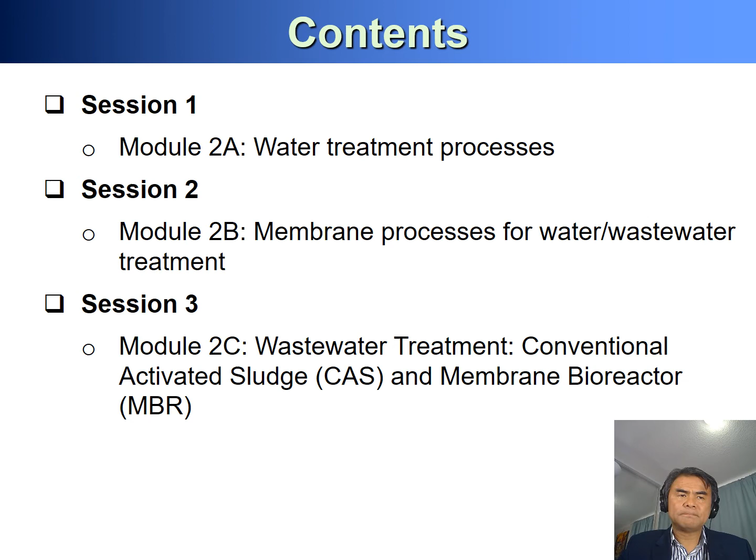So let's start with session 1, module 2A, the water treatment processes or technologies. This session covers different treatment processes or technologies involved for surface water treatment, where and why these treatment processes or unit treatment processes can be applied in a treatment train in a water treatment plant.

By the end of this session, you should be able to understand in more detail what treatment units are required for the water treatment plant, including some of the design considerations and also some of the optional treatments required for problematic water sources.

Before we start with the treatment processes, I want to ask why the treatment is required. I'm sure some of you know, but for the benefit of those who may need a recollection from undergraduate studies: why is the treatment of wastewater required? What are the treatment goals?

Surface water comes from various sources - rivers, streams, lakes, groundwater, rainwater, and so on. But because they are in contact with the environment, they can contain a lot of contaminants, making the water unpleasant in appearance, color, taste, and odor. These contaminants may include suspended solids, dissolved chemicals, dissolved gases, heavy metals, dissolved organic matter, and many other types. All these contaminants have to be removed to make the water pleasant and safe for drinking purposes. That's the reason why we need water treatment.

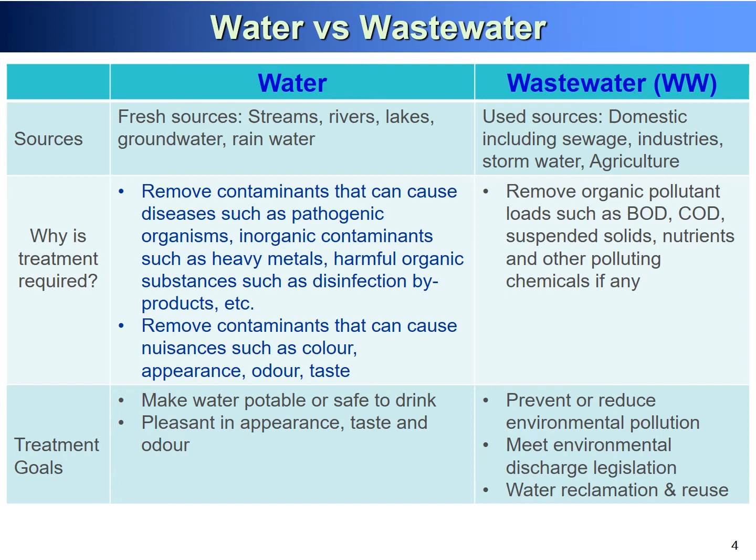As you may already know, any water treatment plant or wastewater treatment plant does not rely on a single treatment process. We need a series of different treatment processes targeting different types of contaminants, because one treatment process is not effective in removing all the types of pollutants present in the water. Hence, water or wastewater treatment processes can be divided into three major groups: physical process, biological process, and chemical process.

In the physical process, we use simple physical forces such as gravitational forces, momentum, pressure, etc. to remove pollutants from the water. Physical treatment processes include mixing, flocculation, flotation, filtration, sedimentation, etc.

The next is the chemical process. In this treatment approach, chemicals are used to remove pollutants, decompose pollutants, or convert them from one form to another so that they can be easily removed by physical or biological processes. This includes treatment processes such as precipitation, coagulation, adsorption, oxidation, disinfection, decomposition, etc.

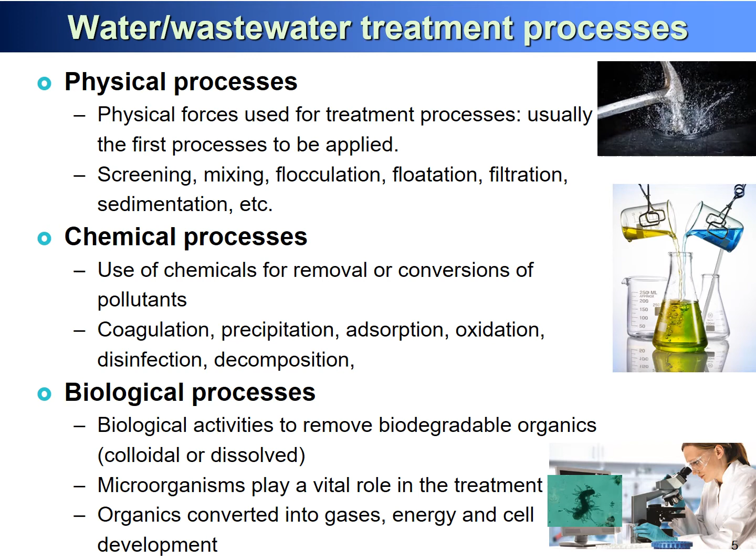The water that we get from the various sources such as rivers, streams, lakes, etc. are first treated at the water treatment plant and made potable for human consumption. After the fresh water from the tap has been used, it is discharged as wastewater from the users.

The wastewater is then collected and sent to the wastewater treatment plant, where it is subjected to a series of treatment processes before releasing back to the environment from where it came, thereby closing the water cycle.

Of course, if a very high quality treatment is performed, then the treated wastewater can be used for non-potable purposes such as irrigation, car washing, cooling, etc.

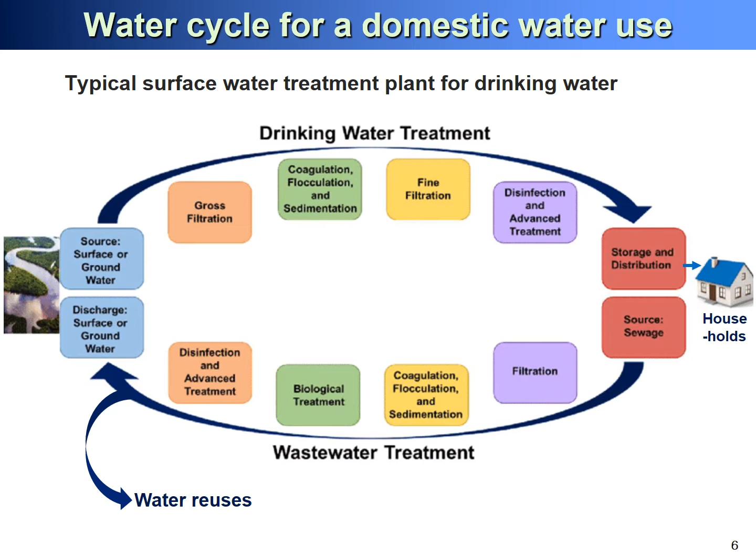This water reuse is nowadays becoming very popular because of the limited freshwater resources due to climate change and global warming impacting the climate. Reusing treated wastewater is in fact one way of significantly reducing the freshwater demand.

The first stage in the water treatment or wastewater treatment plant is the screening process to remove large matter that often comes with the surface water, such as in rivers and lakes.

The second process consists of a grit chamber to remove larger and settleable particles with high specific gravity or density, such as gravels, sand particles, etc.

The third process consists of a rapid mixing chamber where coagulant chemicals are dosed and subjected to rapid flash mixing to enhance coagulation or mixing.

This process is followed by the flocculation chamber, where slow mixing is applied to form large particles of floc, aggregating all the smaller floc particles formed, so that it can settle easily by gravity.

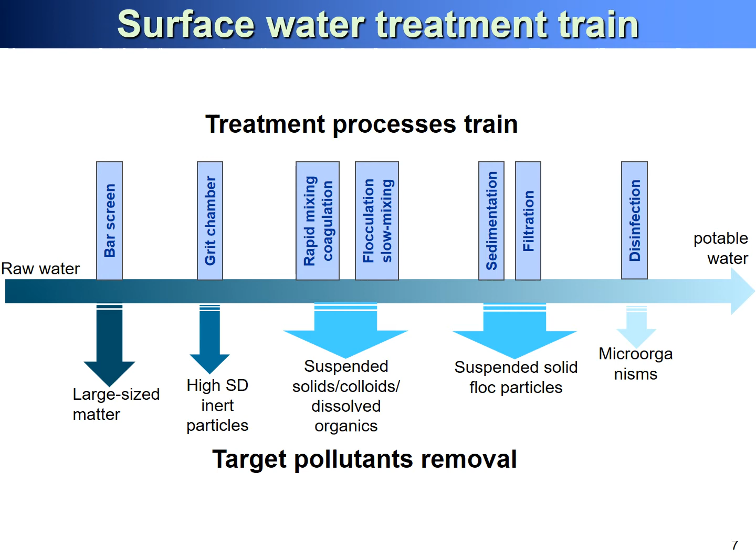After the disinfection, the treated water, which is clean and safe, is then supplied for drinking purposes to households and other uses.

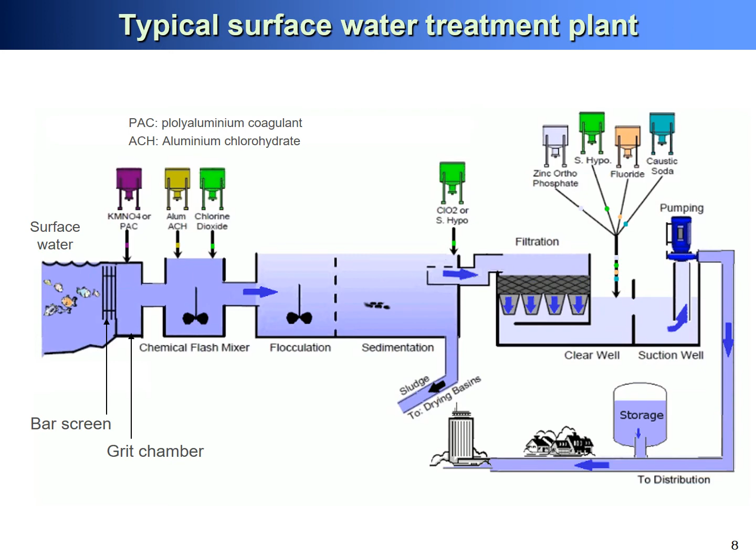The most notable difference that you'll see is the existence of the primary and secondary treatment units in a wastewater treatment plant.

These treatment units are required, basically the biological treatment process, for the removal of the large amount of organic matter present in the wastewater. Organics can be in various forms, such as settleable organic solids, suspended solids, or dissolved organic matter.

Wastewater treatment plants also produce large amounts of organic sludge, which require further treatment through the use of a sludge digester that helps microorganisms convert the organics into methane or energy, and also biosolids, which can be further used as soil conditioners.

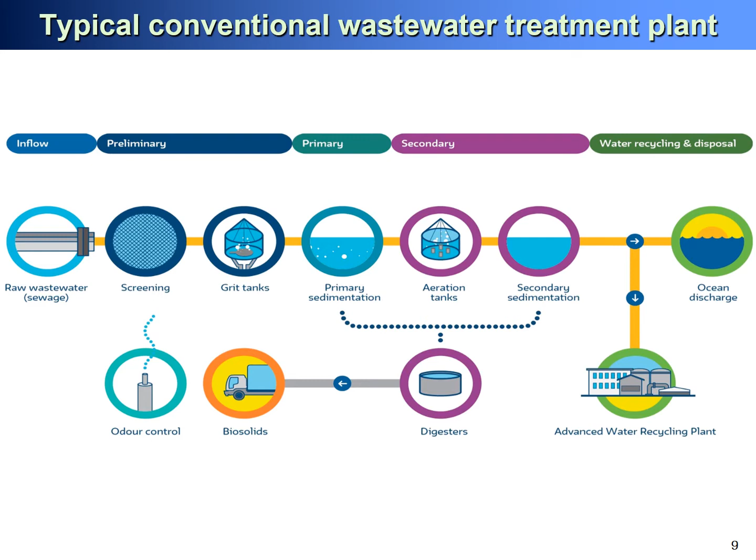We will be talking more about the wastewater treatment process in session 3. So from here on we will be talking about individual processes or treatment units separately.

First comes the screening process. Screening is the process of removing large objects present in the water. It can be in the form of rags, large plastic objects, timber, branches, twigs, metal objects, and many other floating objects that may be subtle also. If they are not removed, they would cause damage to the pumps and blocking of the pipelines at the wastewater or water treatment plants. So screening is the first treatment unit in any water treatment plant, because the main objective is to first remove the largest object matter present in the water.

A screen can be of several types, but mainly a coarse screen or fine screen, depending on the size of the opening. Sometimes the screens are also associated with comminutors that grind or pulverize the large objects into smaller particles that can pass through, and also can be easily separated.

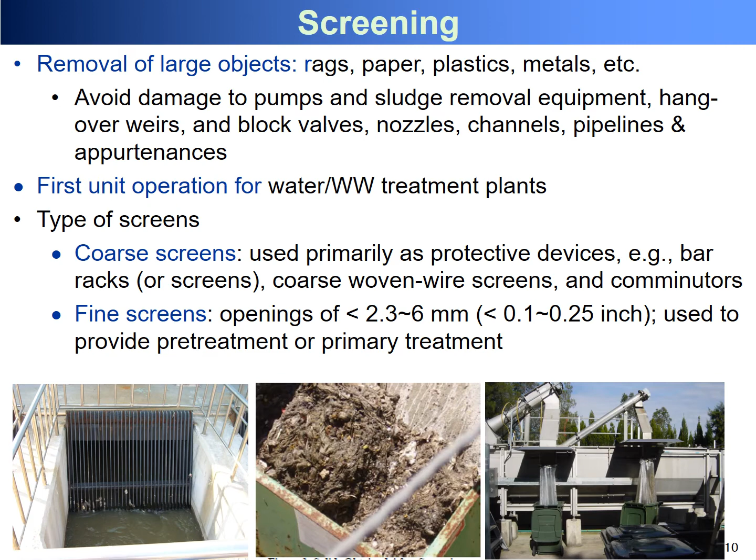The next treatment unit in a water treatment plant is the grit removal or the grit chamber. Surface water, especially if coming from running rivers and streams, can contain a lot of heavy particles with high specific density and gravity that are not removed by the screening unit. These heavier particles are termed grit, and they can consist of particles such as sand, gravels not removed by screen bars, cinders, eggshells, bones, chips, and other inert particles. So the second stage of the surface water treatment plant is usually the grit chamber to remove this grit from the surface water. Grit chambers are basins to remove these inert particles and prevent damage to the pumps, and also to prevent their accumulation in the sludge digesters.

The design of the grit chambers involves reducing the flow velocity of the water to allow settling of only the grit particles. Grit particles are subjected to two types of velocities: horizontal velocity due to the flow of water, and settling velocity due to the gravitational weight, size, and weight of the particles. Lowering the horizontal flow velocity increases the residence time of the particle in the grit chamber, allowing enough time for the particles to settle at the bottom and then be removed.

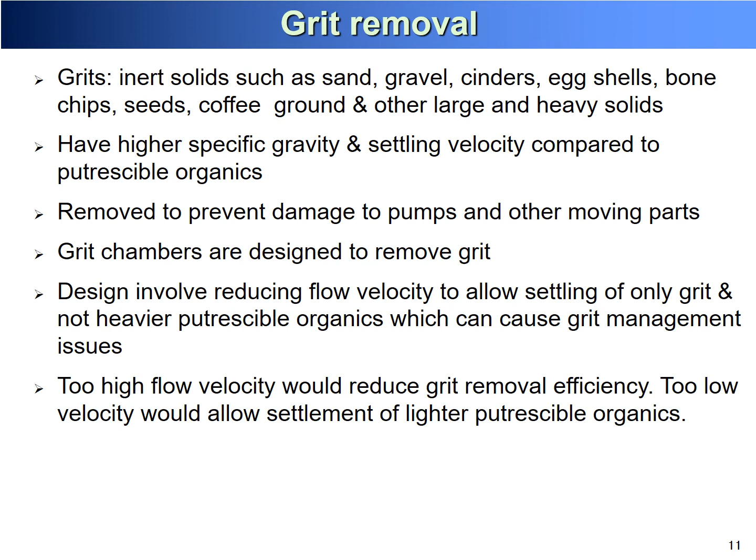There are three types of grit chambers: horizontal flow type, which can be rectangular or square shape; aerated grit chambers; and vortex type grit chambers. Both of the latter are in the form of circular shape.

In the aerated grit chamber, the design consists of a spiral flow aeration tank provided with air diffusion tubes placed on one side of the tank. The grit particles tend to settle to the bottom depending on the particle size and the bottom velocity of the roll of the spiral flow. This bottom velocity is controlled by the rate of air diffusion through the diffuser tubes. So the heavier particles settle down, whereas the larger and lighter organic particles are carried into the roll of the spiral motion.

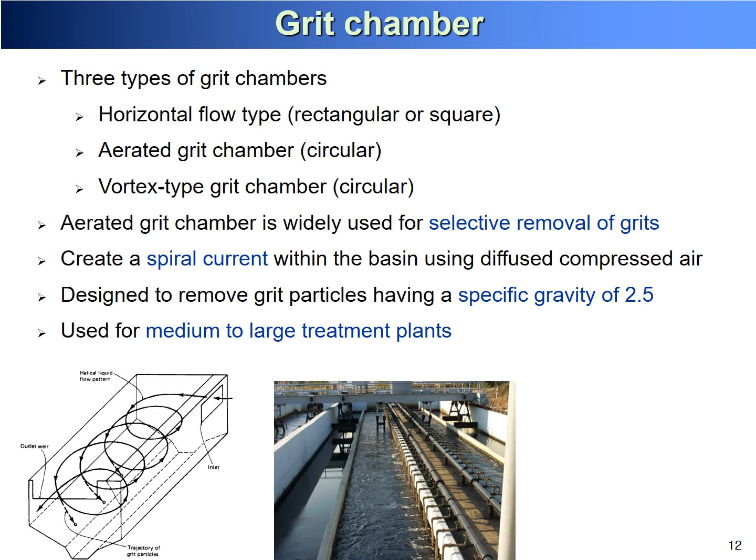The chamber can also be either mechanically cleaned or manually cleaned. Horizontal grit chamber is the most common type of grit chamber used worldwide, because it is simple in design, and also much cheaper in construction and operation compared to the aerated or vortex types.

This table shows the design guides of the horizontal grit chamber. You'll see that the design parameters include the detention time, the residence time of the water in the chamber. The residence time will depend on the horizontal flow rate of the water, the grit chamber cross-sectional area, and the horizontal flow velocity. The approximate settling velocity of the particles depending on size is also provided as a guide.

When you design a grit chamber, the elevation of the grit chamber with respect to the successive treatment units should also be considered, since there can be some head loss in the grit chamber, especially if the water treatment plant is designed based on gravitational flow.

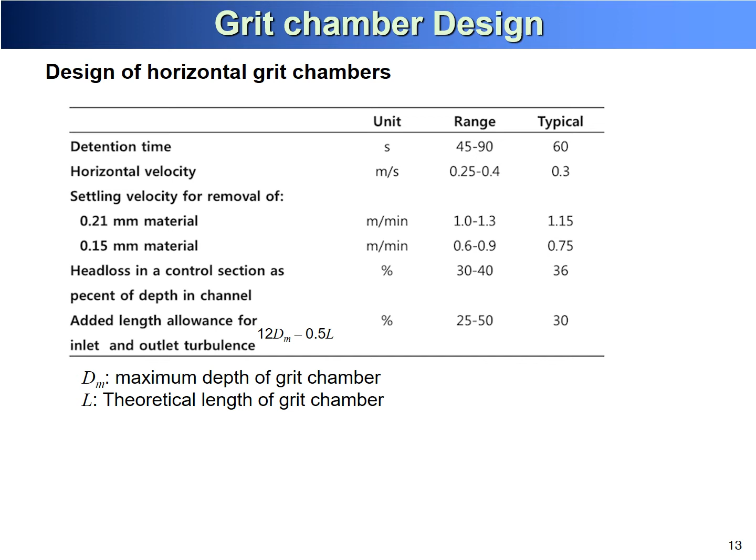The next treatment unit is aeration or oxidation. This is not found in a typical water treatment plant, but is an optional treatment applied if the water contains problematic components that cause taste and color in the water. Usually aeration is adopted by small water treatment plants with very low flow rates, and it's not usually present in large water treatment plants.

In this aeration, air is supplied to the water using air diffuser aeration, or sometimes water itself can be sprayed into the air, which we call air stripping. Basically, we try to provide oxygen to the water to have contact with the contaminants. The removal mechanisms by aeration involve two types: scrubbing action and oxidation action. Most dissolved gases are in fact removed by scrubbing action during aeration, which scrubs the gases present in the water by providing oxygen.

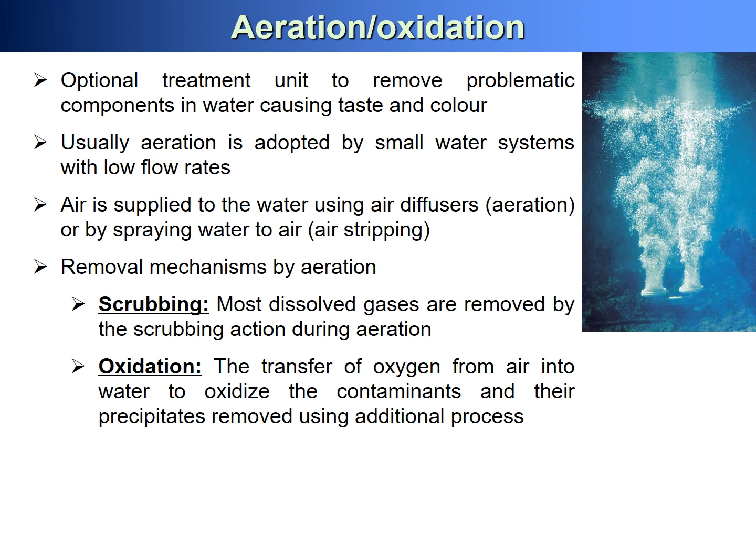Aeration is applied to remove color from the water. Usually groundwater contains a lot of iron and manganese. This manganese can cause color, an unpleasant color in water. For example, iron can cause reddish colored water, whereas manganese can cause dark brown or black color in water. They have to be removed because they create a very unpleasant appearance of the water.

Removal is usually recommended if the iron content in water is more than 0.3 milligram per liter and manganese more than 0.05 milligram per liter. Or the combined manganese and iron should not be higher than 0.3, and if it exceeds that, you have to provide aeration to remove this.

This chemical formula shows how ferrous reacts with oxygen in the presence of water to form ferric hydroxide, which is a solid precipitate that can then be removed from the water. Likewise, manganese also reacts with oxygen and water to form manganese oxide, and this precipitate can be removed from the water by either settling or filtration.

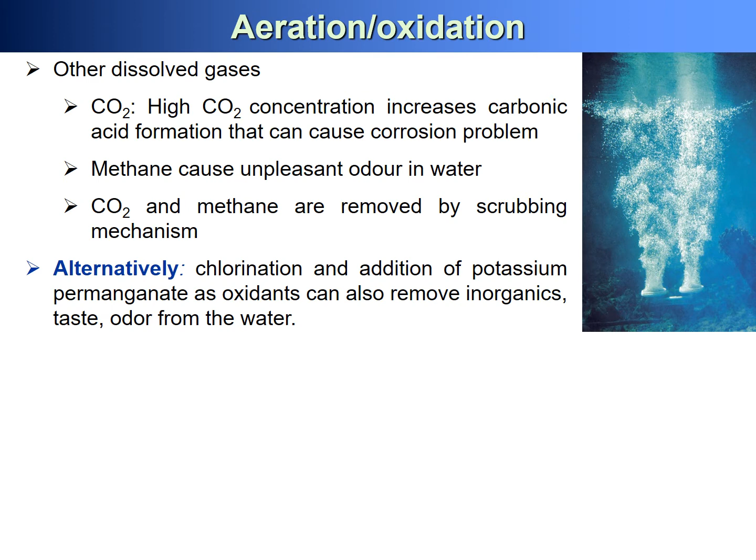Air stripping is another form of providing oxygen in the water to remove contaminants that's problematic for water. In aeration, which we covered earlier, oxygen is dissolved in the water to react with contaminants such as iron and manganese, or to scrub out gases that cause odor, including hydrogen sulfide, carbon dioxide, and methane. But air stripping is the process of transferring the water component containing these volatile compounds into the air stream. Basically, you're spraying the water containing these contaminants and bringing it in contact with air.

In the aeration process, a small amount of air stripping happens, but it's not significant. In air stripping, the water becomes very saturated with oxygen and provides a significant amount of aeration, making it much more efficient in providing oxygen to the contaminants in water. Air stripping alone is not a cost-effective way of providing aeration, but aeration alone is very inefficient at removing volatile compounds. So combining and correctly applying air strippers with aeration can be a very effective and cost-effective, powerful process for providing rich oxygen to remove problematic components in water.

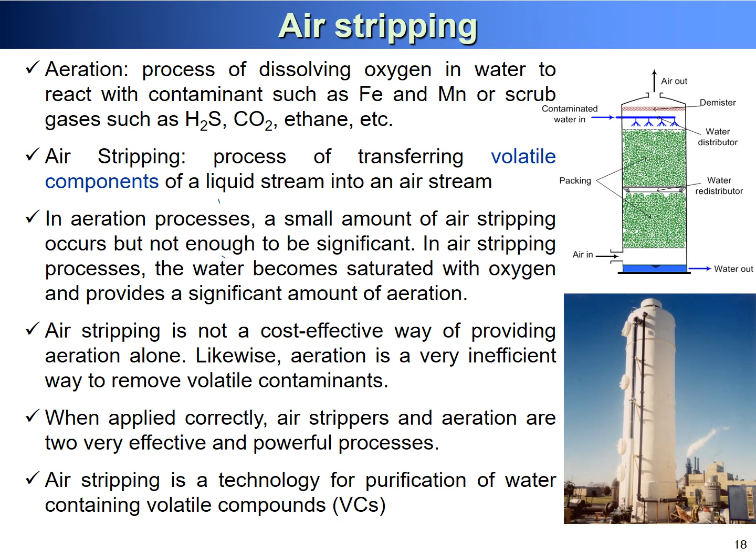Air stripping is the technology used for purification of water containing high volatile compounds. Volatile compounds have relatively high vapor pressure and low aqueous solubility, and they are characterized by a dimensionless Henry's law coefficient. This explains the mechanism of how gaseous volatile compounds can be removed from water by air stripping. Henry's law coefficient is the ratio of the concentration in air to the equilibrium concentration in water, meaning the concentration of the contaminants or volatile compounds in water.

Contaminants with relatively high Henry's law coefficients can be economically stripped from water by air stripping. That's why we apply this method to remove volatile compounds, because they have high Henry's law coefficients. These contaminants include BTEX compounds such as benzene, toluene, ethyl benzene, and xylene, usually found in gasoline, and solvents including trihalomethane, trichloroethylene, and tetrachloroethylene. These compounds are usually found in regions associated with oil reserves.

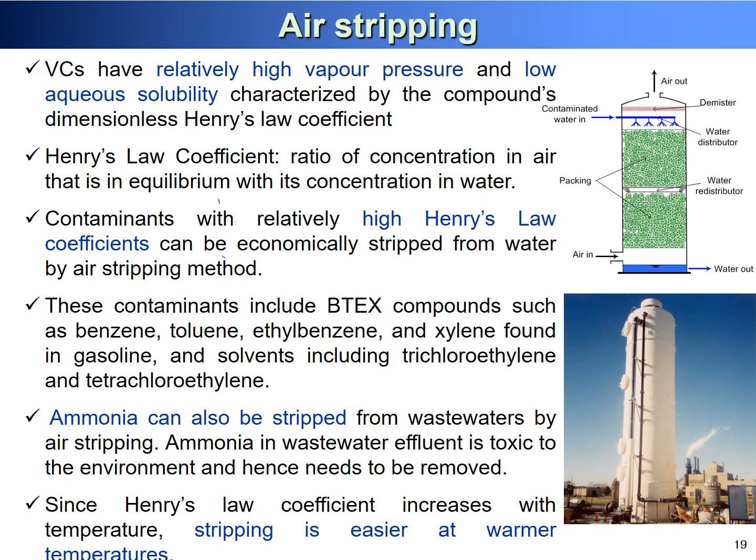It takes a very long time for them to settle — the smaller the particle size, the longer it takes to settle down. So it becomes impractical to use gravitational settling to remove these suspended particles, because it requires very long retention time, meaning very large settling basins.

Besides their size, suspended solid particles also have a net negative surface charge in water, which promotes electrostatic repulsion between the particles, keeping them from settling. This is also aided by their Brownian motion, which keeps them moving and prevents them from settling down.

Turbidity is the measurement used as one of the indicators for colloidal particles or suspended solids in water. Turbidity measures the cloudiness of the water. For potable water, turbidity should be less than 0.5 NTU, and generally it is recommended to be less than 0.1 NTU.

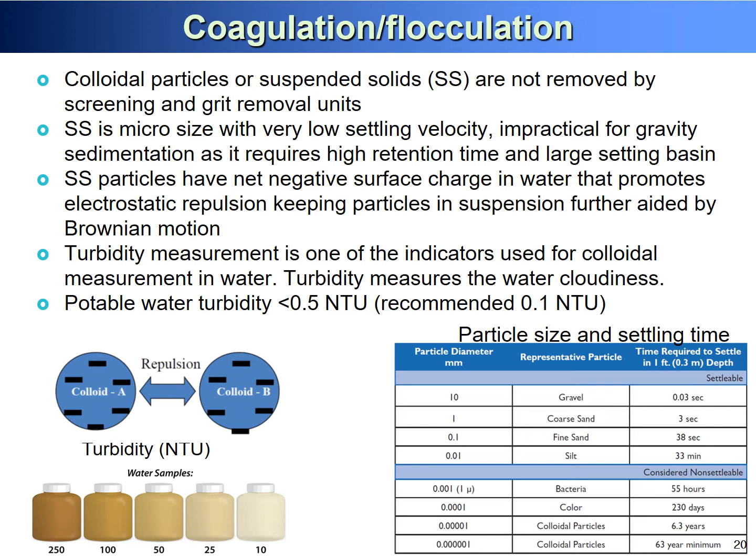If the suspended solids or colloidal particles cannot be settled down, we must have some means to remove them. Coagulation and flocculation are the processes of removing suspended solids from water. Coagulation is the process of destabilizing the colloidal particles or suspended solids by adding chemicals that neutralize the negative charge of the particles. Coagulation is essentially a chemical process, because you add chemicals to the water.

Flocculation is the physical agglomeration of destabilized particles to form larger size aggregates known as flocs, which can be effectively removed by sedimentation or flotation.

During the coagulation process, smaller flocs are formed because the charge is neutralized. When the charges are neutralized, the suspended particles agglomerate and join together, becoming a larger floc. Flocculation further aids in agglomerating these smaller flocs, forming larger aggregates.

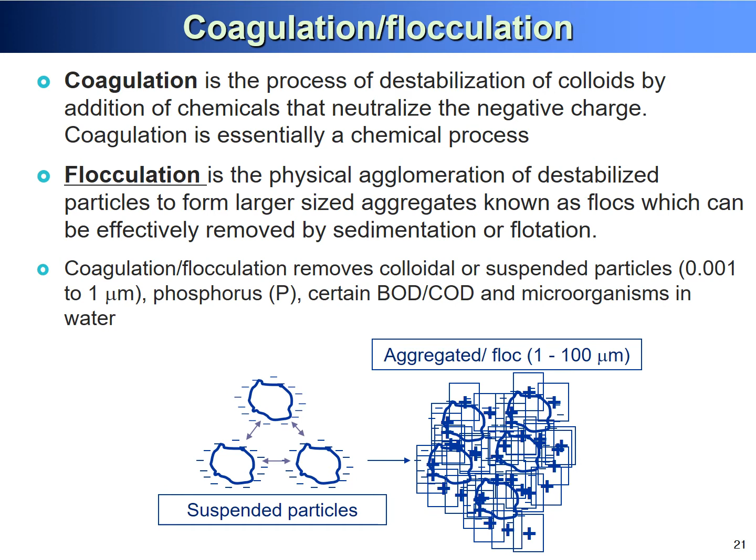Coagulant, sometimes called flocculant, is the chemical used for the destabilization of the colloids or suspended solid particles. Chemicals used as coagulants include alum or aluminum sulfate, polyaluminum chloride, ferric chloride, ferric sulfate, polymers, and some other novel coagulants that have been recently developed

This Al3+ is responsible for neutralizing the charge of the negatively charged suspended solids. So the negatively charged suspended solids move towards the Al3+ aluminum ion, agglomerate with each other, and neutralize.

When they neutralize, there's no more electrostatic repulsion. With no electrostatic repulsion, during Brownian motion the particles collide with each other, and larger aggregates are formed, which then settle down after forming a larger floc. This is called charge neutralization, and this is the mechanism of how larger flocs are formed through flocculation, and then removed.

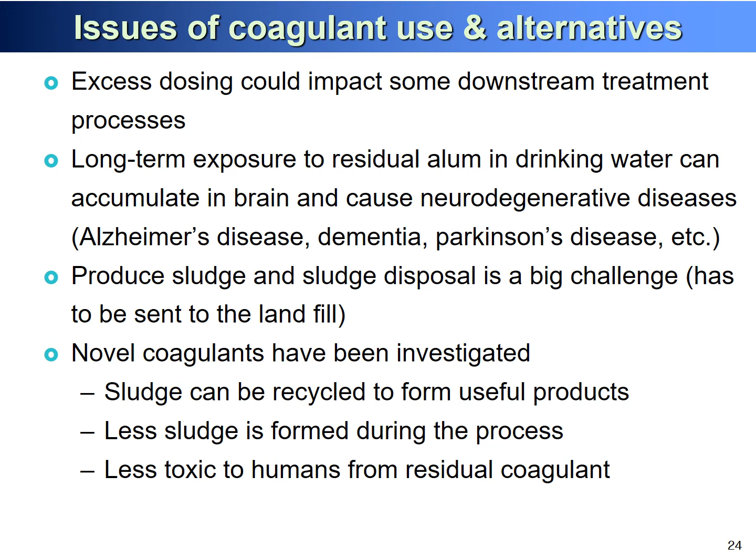Our group, led by Professor Ho Kyong Shon, has done quite a lot of work on the development of novel coagulants that can be recycled to form useful products. An example is the titanium-based coagulant: titanium chloride, titanium sulfate, polytitanium chloride, and polytitanium sulfate. These are some of the examples of the novel coagulants being recently investigated by our group.

Titanium based coagulants are quite expensive, but the advantage is that titanium based coagulants can have a lot of different species in water, and because of that the charge neutralization is very effective because they are multivalent cations.

The most useful advantage is the ability of the sludge to be converted into titanium dioxide, which is a very useful photocatalytic material in nanoparticle form. After the coagulation, the sludge is burnt, and after burning the sludge and grinding the residual product, you get a titanium dioxide powder.

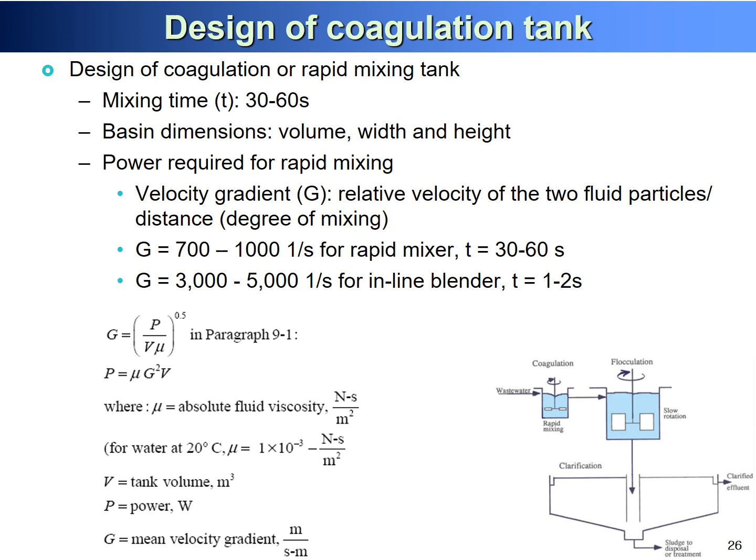G is the velocity gradient, which gives the degree of mixing. G values should be between 700 and 1000 per second for a rapid mixer with a mixing time of around 30 to 60 seconds. But if we want to do inline mixing, instead of having a separate rapid mixing tank, you can mix inline through the pipeline. In that case you can assume G to be around 3000 to 5000 per second, with a very short mixing time of only 1 to 2 seconds.

Next is the design of the flocculation tank, or the slow mixing tank. For this, you can use a detention time of around 20 to 60 minutes, and based on that you can determine the dimensions of the tank: volume, width and height. The G values for flocculation should be around 20 to 80 per second, and typically G times T should be within the range of 2 times 10 to the power 4 and 10 to the power 5.

Why do we give these ranges? Because if you have a larger G and a smaller T, you will get a dense floc but very small floc particles. But if you have a smaller G, meaning very slow mixing, with a much longer mixing time, this gives you a very large floc size but not a very dense floc, so it cannot settle easily. So we need a balance — we need a larger floc that is also heavier, or denser.

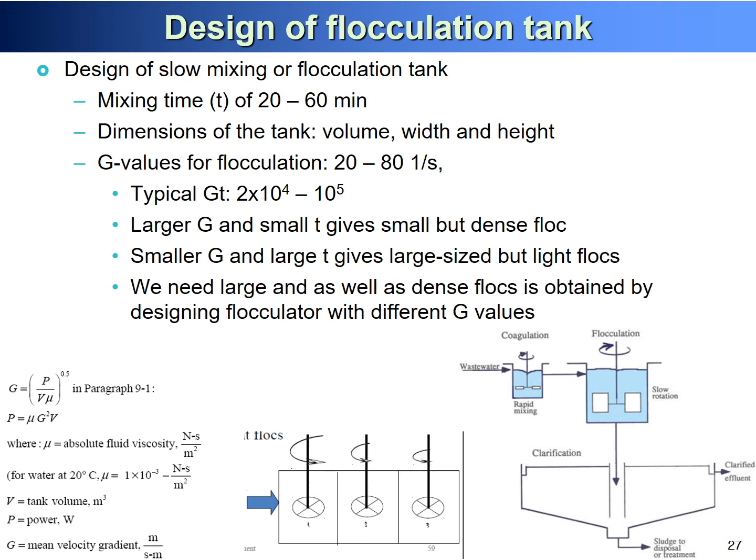Sometimes this can be achieved by designing a flocculator with different G values. The same equation can be used for the design of the flocculation tank.

Once the water is passed through the coagulation and flocculation tank, then it is sent to the sedimentation tank. In the flocculation tank, the smaller floc particles that are formed aggregate to form larger, heavier flocs, and then when they reach the settling tank, the suspended solids or these aggregated particles are allowed to settle by gravity and then removed from the water.

So how they do this is by designing it in such a way that the water velocity in the settling tank is lowered below the suspension velocity of the particles, and this allows enough time for the aggregated particles to settle at the bottom by gravity and be removed. This process is also sometimes called clarification, settling tank, settling, or sedimentation.

Gravitational settling because of the formation of larger floc particles is one way of settling, but there are also other mechanisms involved in the removal in sedimentation tanks. This flocculation is caused by the different settling velocities of the particles, and when they settle, these heavier particles overtake the lighter particles, and they coalesce with each other, meaning they aggregate and form larger particles that then settle at the bottom. In fact, this clarification or sedimentation could remove up to 90% of the suspended particles from the water.

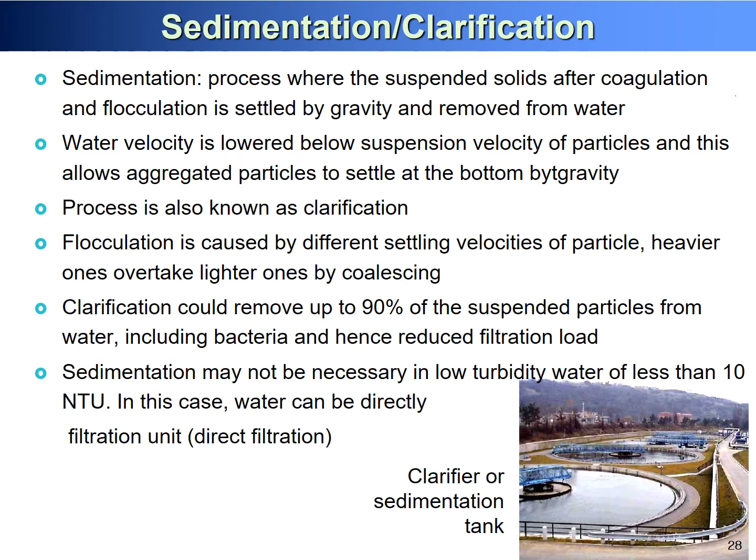The sedimentation tank can be designed as a rectangular tank, which is one of the simplest forms of design. They are quite cost effective and have low maintenance cost, but the disadvantage is that they require a very large area because they are very long in length.

So usually in most cases, the circular sedimentation tank is the most preferred sedimentation tank that you will see in most water treatment and wastewater treatment plants. Sometimes square sedimentation tanks are also provided. The sedimentation tanks can also have a scraper at the bottom to remove the sediment, whatever is settled at the bottom.

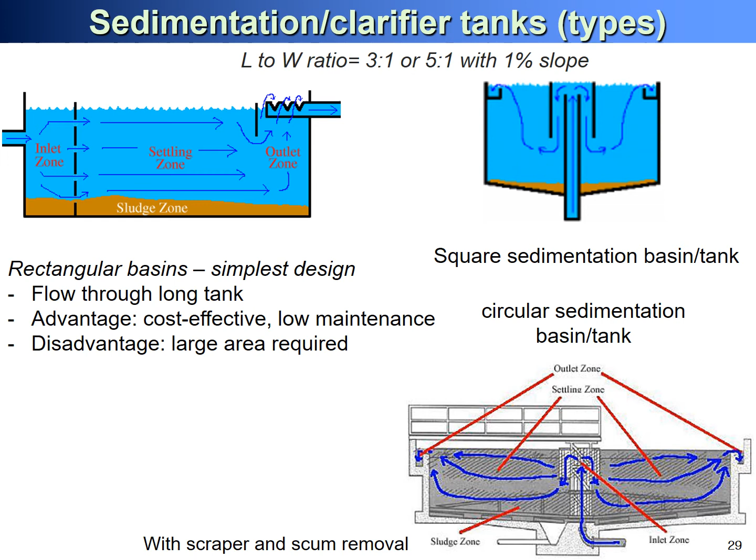Sometimes the range of height that you can provide is also given, and based on that you can find the surface area of the tank, or sometimes the width to length ratio of the sedimentation tank is also given if you are designing a rectangular or square sedimentation tank. The height of the sedimentation tanks is usually recommended between 3 meters and 3.6 meters, and based on these design guidelines you can design the sedimentation tank.

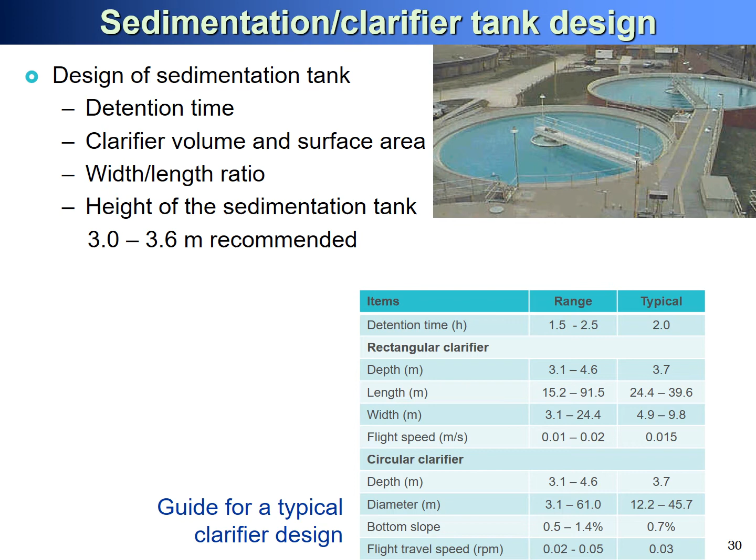So the next stage of the water treatment plant is the filtration unit. The water coming from the sedimentation tank still contains about 10% of the suspended solids. So the objective of filtration is to remove those suspended solids and the floc particles that are too small to be effectively removed by the sedimentation tank.

The filtration removes the suspended solids or small floc particles by physical straining, sieving, settling, and adsorption within the filter media. In fact, filtration can remove up to 99.5% of the suspended solids coming from the water leaving the sedimentation tank.

The filtered water after filtration can have less than 0.5 NTU of turbidity, but the desirable level is less than 0.12 NTU. Nowadays filtration is a must in most water treatment plants, because turbidity can be problematic: microorganisms growing in the suspended solids are hard to kill by chlorine disinfection, and sometimes the colloidal particles themselves use up a lot of chlorine, affecting the residual chlorine.

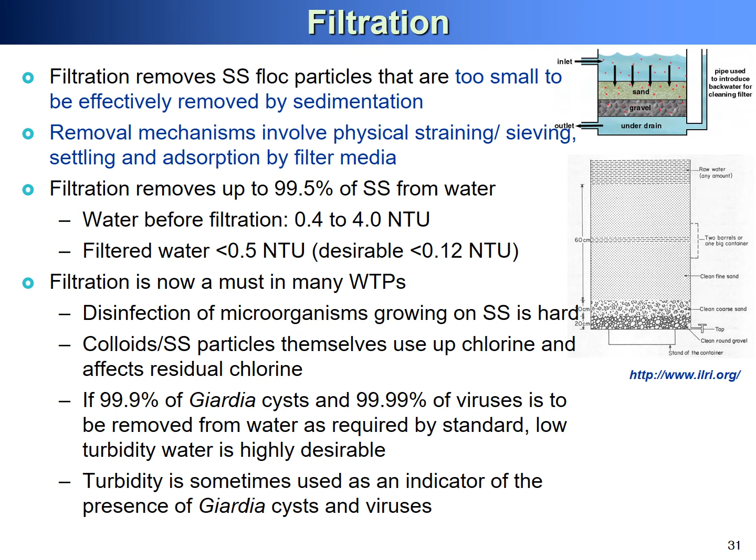For the design of the filtration unit, the type of filter media and the size are quite important. The types of filter media can be single media, such as sand, or dual media, anthracite coal and sand, or multimedia, which is a mixture of 3 or more different types of filter media.

So dual or multimedia filter is more effective because sometimes it can potentially remove some other problematic pollutants present in water by adsorption.

As particles are removed by filtration, the particles deposit on the filter media surface and get clogged, which can result in head loss. Because of this, sometimes the turbidity can also increase in the filtered water. So in order to solve this problem, the filter has to be backwashed.

Backwashing involves forcing water in the reverse direction of filtration to dislodge all these deposited particles from the filter media. It's usually done once a day, and it takes about 10 to 15 minutes, and this is done using clean water usually stored in the overhead tank.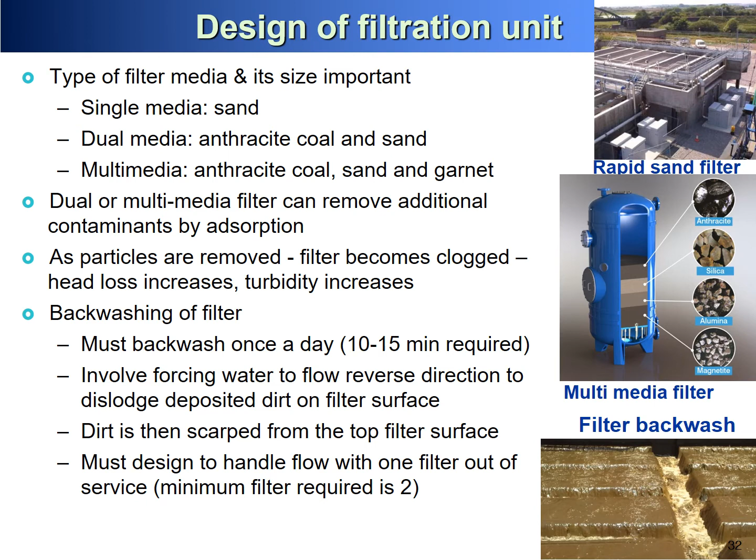For the design of the filtration unit, surface loading is the important parameter that we need to consider. Surface loading relates to the amount of water flow rate that you can apply per square meter of the filter area.

So for slow sand filter, it is between 2.9 and 7.6 cubic meters per day per square meter. Which means if you have a water treatment capacity of 2.9 cubic meters per day, then you need 1 square meter of filter area.

For rapid sand filter it is much more, about 120 to 300 cubic meters per day per square meter.

As I said earlier, normally we need to construct at least 2 filter media, and usually the number is designed as an even number. The surface area of each filter should be less than 100 square meters.

So if, for example, 300 square meters of filter media is required, then it's better to provide around 4 numbers of filter media.

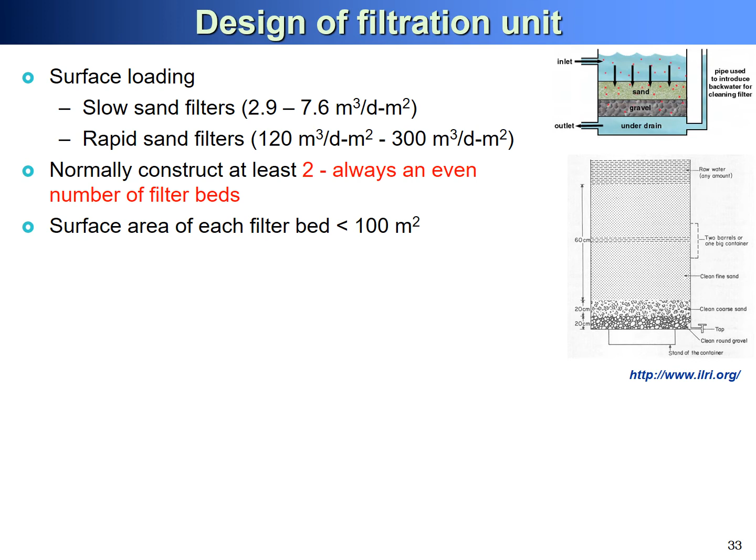The next process in a water treatment plant is adsorption. This is an optional treatment because you don't find this process in a typical water treatment plant, but it is applied usually for removing problematic compounds or contaminants present in water, especially if they are present in very low or trace concentration.

Adsorption is the process of adhesion of atoms, ions, or molecules of gas, liquids, or dissolved solids onto the surface of the adsorbent. So what it does is basically a surface phenomenon.

The adsorbent can be a natural adsorbent such as soil, sediments, etc., or it can be man-made, anthropogenic, like activated carbon, silica, etc. They provide a very large surface area, and the dissolved compounds or contaminants in water can be removed by this adsorption.

For example, trace compounds such as pesticides, heavy metals, pharmaceutical compounds, and personal care products are hard to be removed by filtration and coagulation. So if you must remove them from the water, adsorption is the effective way of removing them.

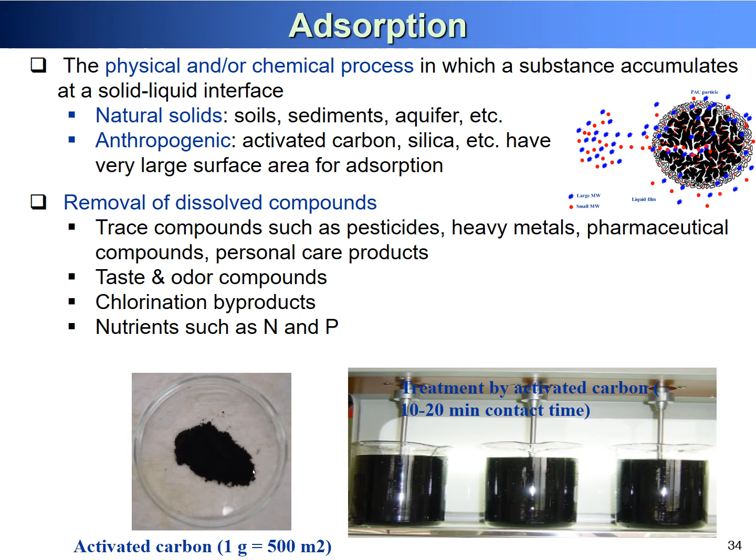The theoretical adsorption capacity of the adsorbent can be described by adsorption isotherm. I'm sure some of you must have learned this in chemistry in high school and also in undergraduate. So there are types of isotherm: Langmuir isotherm, BET isotherm, and Freundlich isotherm.

Freundlich isotherm is widely used in water treatment. This isotherm shows a curve relating the concentration of the solute on the surface of an adsorbent to the concentration of the solute in the liquid which it is in contact with. So basically it gives you the kinetics of how the removal process happens from the water using a particular adsorbent.

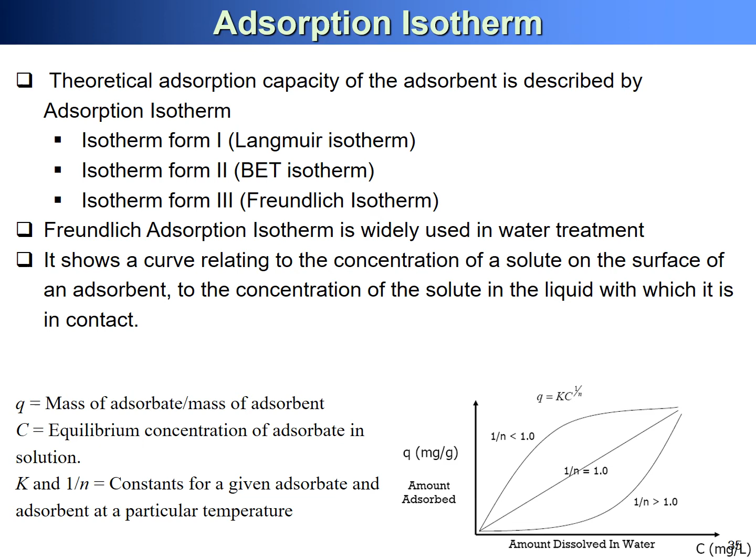The next is the ion exchange process. Ion exchange is the process of exchanging ions between electrolytes, or between an electrolyte solution and a complex. Ion exchange is an optional treatment unit and is not found in a typical water treatment plant.

Ion exchange is sometimes used for treating hard water. Hard water is caused by the presence of excess calcium and magnesium in the water, and ion exchange is one of the processes used for removing excess calcium and magnesium from the water.

In the softening stage, hard water containing calcium and magnesium passes through the packed resin containing a lot of sodium ions attached to it. The calcium and magnesium ions present in the water are exchanged with sodium, and the water coming out of the ion exchange tank contains more sodium and less calcium and magnesium, making the water soft.

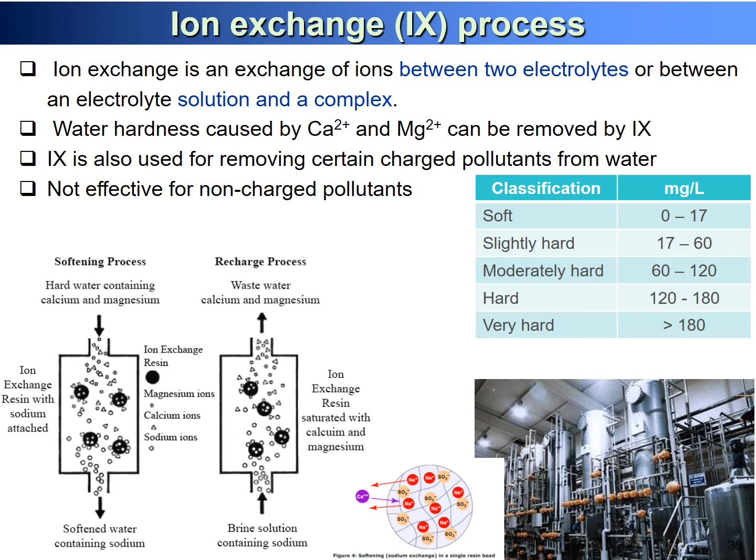So one cycle consists of the softening process and the recharge process, and it continues working this way. But to have continuous operation, usually there will be two ion exchange tanks: one working in the softening stage while the other is working in the recharge stage.

The last treatment unit in a water treatment plant is disinfection. The clean water coming from the filtration unit is subjected to disinfection before it is sent to the water supply system. The water used for drinking and cooking should be free from pathogenic organisms that can cause disease.

Diseases and illnesses such as typhoid, dysentery, cholera, and gastritis are very common if the water is not properly disinfected. So the biological quality of drinking water is determined by the test for the coliform group of bacteria.

Coliform is found in the intestinal tract of warm-blooded animals and also in the soil. Their presence in the water indicates pathogenic contamination, but they themselves are not considered pathogenic. Therefore, coliform bacteria is used as an indicator for pathogens, because they are easy to test, survive longer, and are less sensitive to disinfection.

The standard for coliform bacteria in drinking water should be less than one coliform colony per 100 milliliters of water.

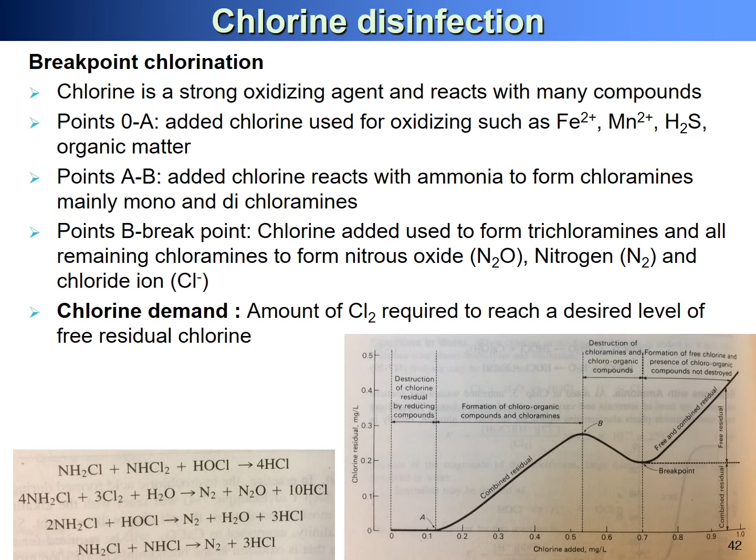In an ideal water supply system, the free chlorine should be at a concentration of 0.3 to 0.5 milligram per liter after a 10-minute contact time. Regarding chlorination levels, sometimes a situation arises such that it doesn't allow adequate contact time with the normal dosages of chlorine.

In such cases, we do superchlorination, which is the process of providing a very high concentration of chlorine to achieve very high residual chlorine, say from 3 to 5 milligram per liter, which is 10 times the recommended minimum breakpoint chlorine concentration. The retention time for superchlorination is around 5 minutes.

But having very high residual chlorine is not really recommended. So in order to bring the residual chlorine down to an acceptable level, dechlorination has to be done before supplying the water. The dechlorination process involves removal of total residual chlorine or combined or free chlorine from water with the addition of sulfur dioxide, activated carbon, sodium sulfite, or sodium metabisulfite as additional chemicals, in order to reduce the toxicity of residual chlorine on the downstream pipelines.

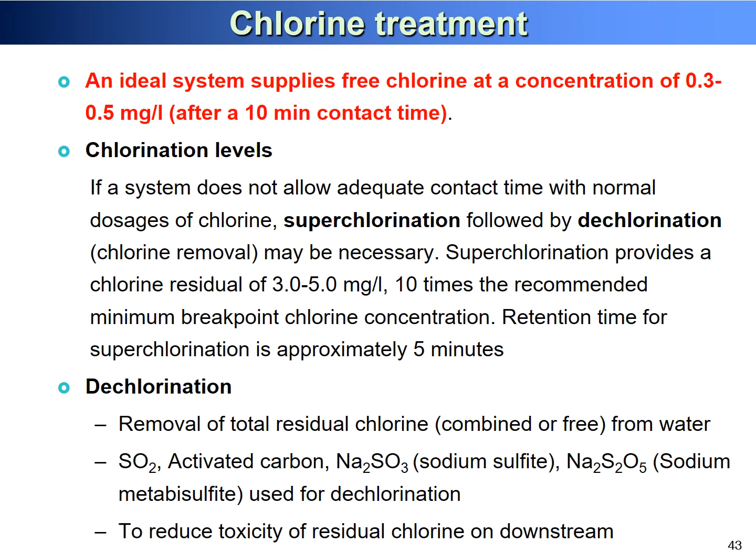Superchlorination is usually used during the outbreak of epidemics such as cholera, dysentery, and other waterborne diseases.

There are other disinfectants, including hypochlorite salts such as sodium hypochlorite and calcium hypochlorite, but they are not as effective an oxidizing agent as chlorine. Chlorine dioxide is another one. Ozone, of course, we have seen, but we already touched on it. And ultraviolet radiation and advanced oxidation processes—but we have already covered this in the earlier session.

The Australian Drinking Water Guidelines state that chlorine in the water pipeline should not be more than 5 milligram per liter—this is the maximum permissible. Normally, the chlorine concentration in the drinking water pipeline should range between 0.5 and 1.5 milligram per liter. In fact, in drinking water, if it's treated well...

by coagulation and flocculation followed by filtration, 1 milligram per liter of chlorine for 30 minutes contact time is generally sufficient to reduce bacterial numbers. For wastewater treatment, it requires up to 20 to 40 milligram per liter of chlorine.

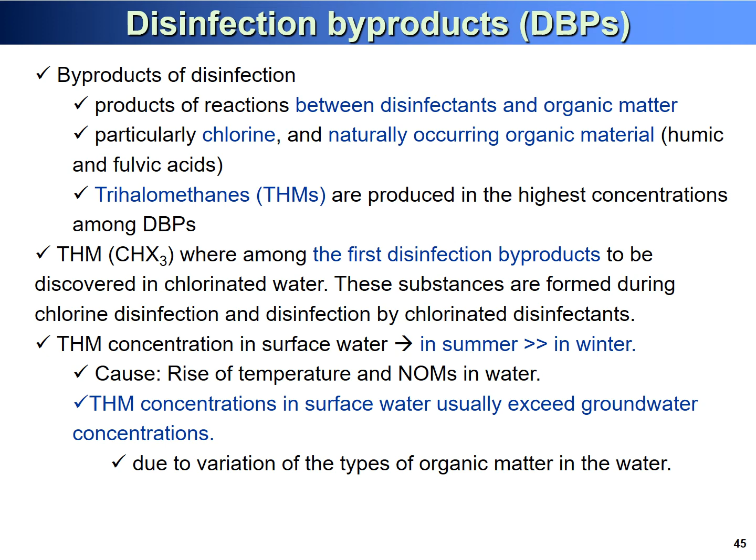THM concentration is quite high in surface water compared to groundwater, and in summer THM formation is higher than in winter, because the concentration of natural organic matter and the temperature play a vital role in THM formation.

THMs are considered carcinogenic because they can damage the liver, kidneys, and central nervous system. That's why in some countries there are standards stating that the THM concentration should not exceed certain limits. I don't have the exact number here, but in the United States they have a standard for THM concentration.

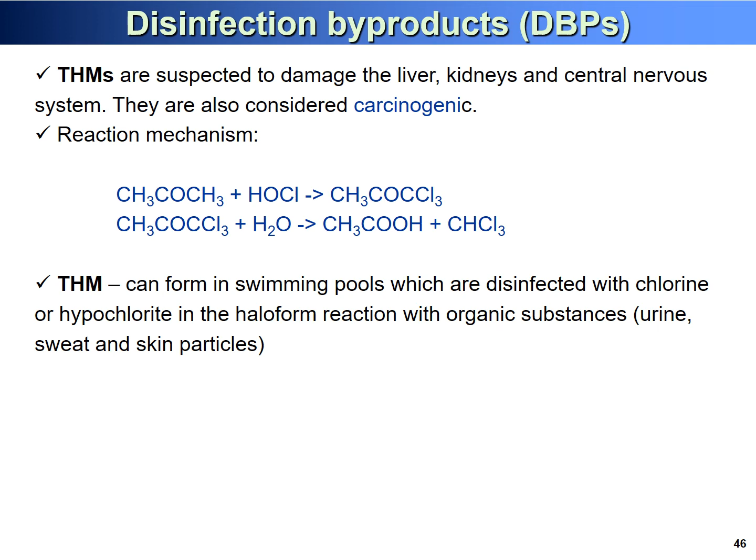THMs can also be formed in swimming pools where chlorine or hypochlorite is used as the disinfectant. When it reacts with urine, sweat, and skin particles from people, it can also form THMs or disinfection byproducts.

The next is UV disinfection. UV is electromagnetic radiation at a wavelength of 100 to 400 nanometers, and can be very effective in denaturing the DNA of microorganisms, thereby killing or inactivating them in water. The UV wavelength of 255 to 265 nanometers is the most effective in destroying DNA and RNA of the microorganism, and is the most lethal wavelength for UV disinfection.

At 280 nanometer wavelength, UV is able to denature proteins and enzymes as well. The quantity of energy transmitted at a wavelength of 254 nanometers is usually the standard used for estimating UV disinfection potential for any water. However, UV disinfection is seen as a very energy intensive process, and the lamps are quite expensive.

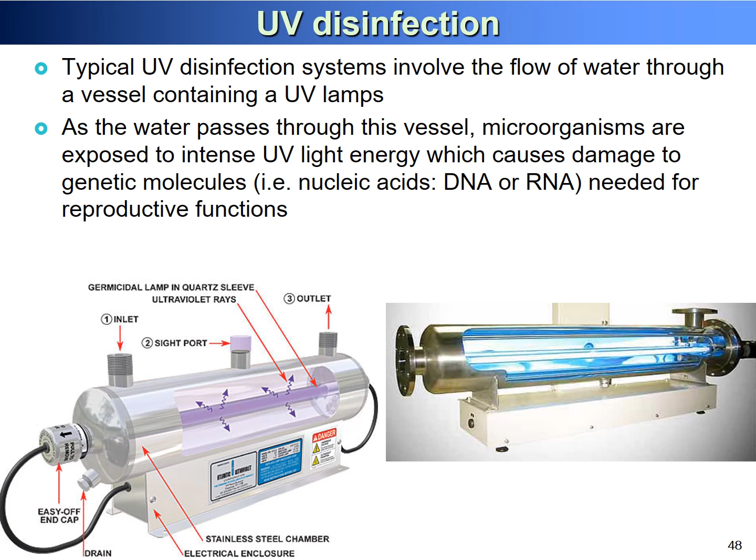However, for UV to be effective for disinfection, it requires maintaining a minimum UV dose. The UV dose can be calculated using an equation, a multiplication of UV intensity and time of exposure. You can do the calculations, and the minimum time of exposure is around 10 to 30 seconds, to achieve or inactivate 99.9% of bacteria.

For UV disinfection to be effective, the water being treated has to have very high transmittability, meaning the turbidity of the water has to be very low, less than 0.12 NTU. If the turbidity is very high, then UV disinfection is not very effective, because it will not transmit the UV, rendering it ineffective.

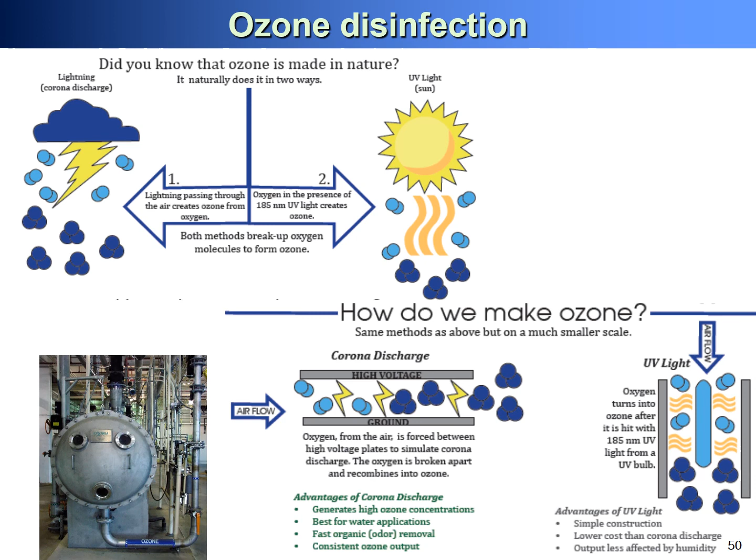Similarly, the same UV light approach can also be applied to form ozone. The corona discharge method can generate very high ozone concentrations and is best for water applications, while ozone generation using UV light is simpler in construction and lower cost than corona discharge.

So it can directly oxidize, for example, nitrite to nitrate. It also helps remove color and dissolved organic matter by breaking up non-biodegradable compounds into smaller, more biodegradable compounds. It also helps remove dissolved and fine particulate matter in water, thereby enhancing the water treatment processes.

How does ozone kill bacteria? The healthy bacterial cell wall is very important for bacteria because it ensures the organism maintains its shape and stays intact. But as ozone molecules come in contact with the cell wall, an oxidative burst occurs which creates a tiny hole in the cell wall, thereby injuring the bacteria.

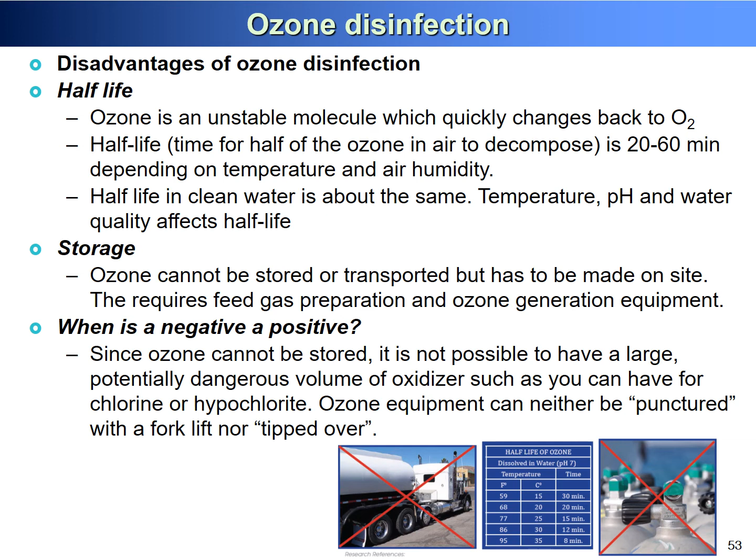And so it has to be used immediately, and it cannot provide residual chlorine or residual disinfection. Besides, ozone cannot be stored or transported; it has to be generated on site. This requires feed gas preparation and ozone generation equipment. It needs pure oxygen, because if you use air as the source of oxygen for generating ozone, it's not very effective. So these are some of the disadvantages of ozone disinfection.

Finally comes the selection of the water treatment process and processes. You'll see that this is the most challenging part of environmental engineering for water treatment. Selecting the best, most ideal, or optimum processes is quite challenging. So usually you start with the process diagrams, which is a flowchart of the treatment trains that you're going to establish for the water treatment plant.

But while working on your process diagram, it's important to consider the following. First, you need to understand the characteristics of the source water you're going to design for. The source water characteristics include what contaminants are present in the water. If you know the detailed characteristics of the water, you can target what the treatment requires to remove, because after all, the objective of treatment is to remove these contaminants. If there are no contaminants, there is no treatment required.

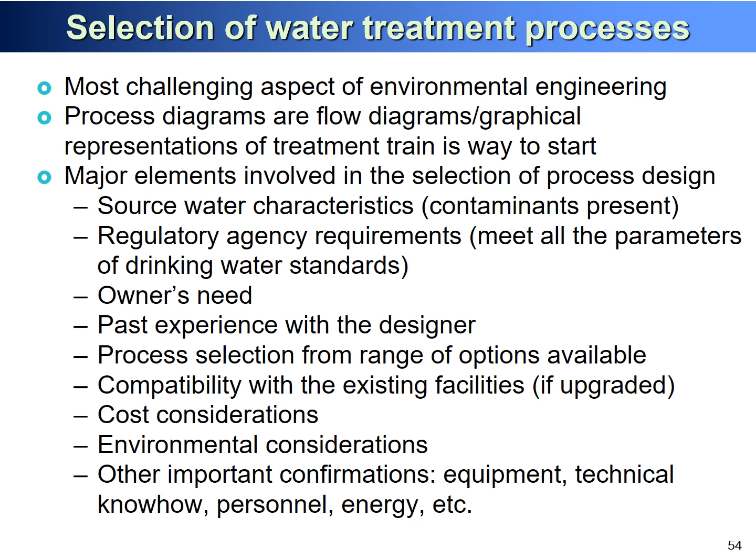And the personnel, technical know-how of the people. If the local people don't know the technology, then it is a problem, because once you install the water treatment plant, it can cause problems with operation, maintenance, and troubleshooting. And the energy, of course, I already mentioned.

So let's recap what we have learned earlier and try to apply this to the process diagram - the process train in a water treatment plant, a typical water treatment plant. Depending on the water characteristics, in some cases you may just have to have chlorination.

You don't have to have any filtration or coagulation - that depends on the quality of the water. If the quality of the water is very clean, then only chlorination is required just to disinfect the water and supply it directly to the people. This usually happens on a very small scale in villages, especially where the water source is very clean - maybe a very clean stream, or the groundwater is very clean. When you have that kind of very clean water source, you just chlorinate and supply it. You don't require other treatment.

And maybe if there are some particles of concern, a little bit of suspended solids - if the turbidity is maybe, say for example, between 1 and 5, not very high, but the water is still quite clear - then you can use just simple filtration like sand filtration or coal filtration, together with chlorination, and supply it for drinking water purposes.

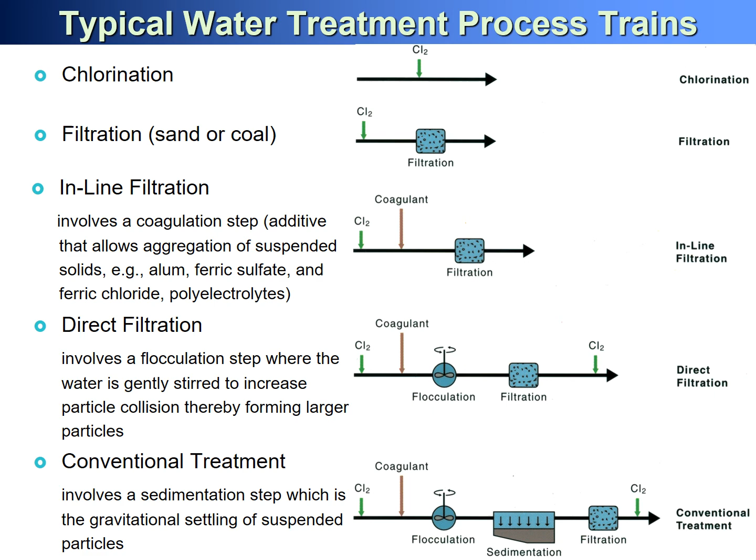But in most treatment plants, or conventional treatment plants, all of this process will be there. You have coagulation - and you haven't shown the grit chamber and screen bar that should be there - then addition of coagulant, coagulation with rapid mixing, then flocculation with slow mixing, then a sedimentation tank, followed by filtration, and then you supply the water. So this is the typical conventional water treatment plant.

Now let's talk about the advanced treatment, how it looks like. Advanced treatment is a combination of conventional treatment process with additional processes to remove the extra contaminants.

Oxidation may be required if there is a presence of taste and odor in the water, maybe because of organic matter present in it, or gases such as hydrogen sulfide and methane, or maybe there's a color in it because of the presence of iron and manganese in water. So all this has to remain addressed.

You can have oxidation at the initial stage, maybe in the form of aeration, or you can have ozonation, chlorination, or potassium permanganate addition. All this can remove unwanted taste, odor, and color from the water.

So you have coagulation, flocculation, sedimentation, sand filtration, which continued, and you still have problem with the dissolved organic matter. Then you can have enhanced oxidation, also called advanced oxidation process. In this case, you basically target removal of dissolved organic matter.

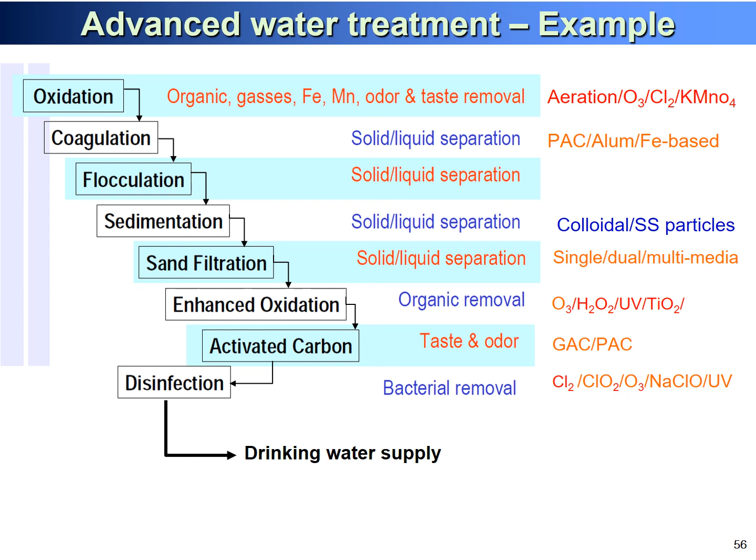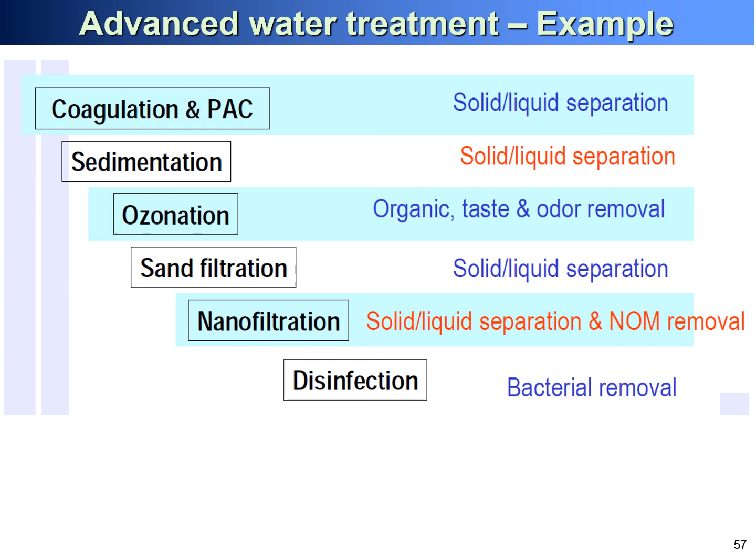And finally disinfection for the bacterial removal. So this is one combination that you can have as an advanced form of water treatment.